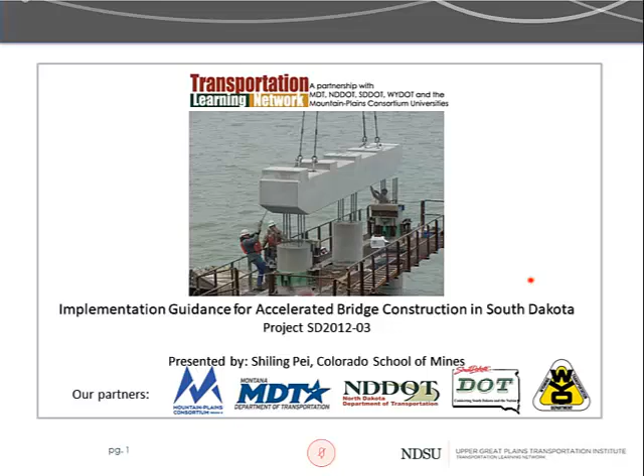The outline of my presentation will talk about the project background and motivation, which we touched on already. The literature review is a huge part of this research project, simply because, if you think about it, in South Dakota we're trying to learn what we can do with ABC, and before we even started this project, other state DOTs and other research institutions had done a lot of research and even some very significant projects on ABC. So a big part of this project is to conduct literature reviews and then come up with the summarized ABC catalog, which you will see here, for South Dakota DOT, so that it can serve as a reference material.

In addition to literature review of the reports and papers, we also conducted ABC interviews. Those are towards the states who have the experience and have done projects with ABC. So we'll walk through those interviews, what we talked about, and what are the main findings.

Those two items, we combine all that information and then consolidate it into an ABC catalog, which you can think of as your component-based recipe book. If you have a project, you're thinking, oh, gee, am I going to do ABC or not? First, you can come to the catalog and say, what's possible, okay? The catalog itself has a lot of good information, but it doesn't really tell you when you should use one

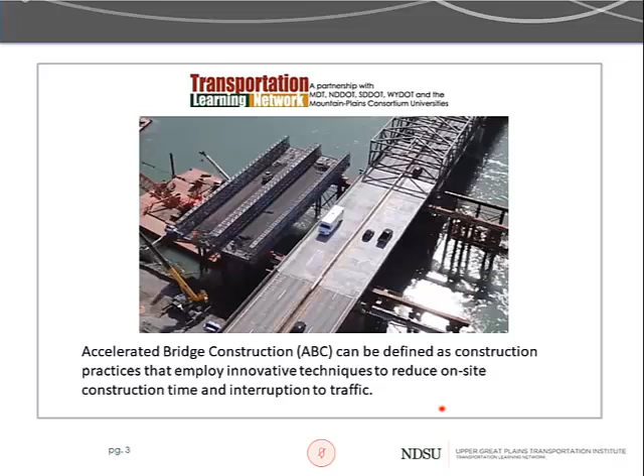Okay. Well, I assume that if you're in the presentation, you know what ABC is, but basically it's just how we can build bridges pretty fast to minimize interruption to the traffic. That's how I see it. The statement on the slides is, I think, the official definition from the Federal Highway website. I believe so. The point, if you get one thing out of this presentation, is that you don't want to do ABC just because you can.

The picture shown here is actually, if you think about it, ABC as this new technique that gets spearheaded around the nation. The kind of harbor of ABC is down in Florida, and I think a couple months ago they had this bridge collapse. I don't want to make a statement because I believe they're still under investigation, but

sometimes you have to think about it, because as public offices, DOTs' true objective is really how to serve the public better rather than getting a box checked. Oh, we are doing ABC. Safety first. That's very important.

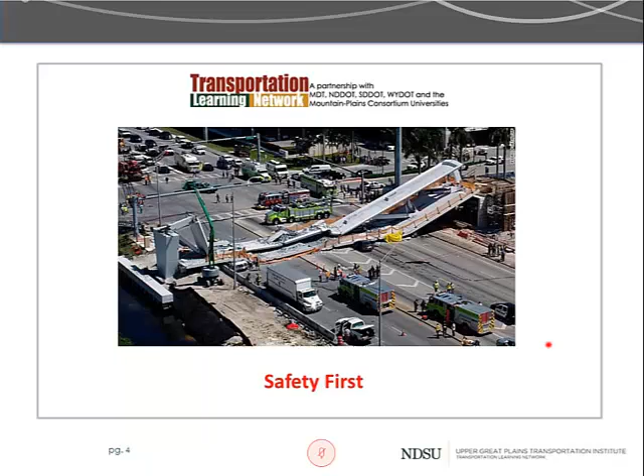So let's dial it back to 2012. We had this project from MPC and South Dakota DOT. So basically, each entity funded 50% of the project because we had the interest in looking at South Dakota, the application of this Every Day Counts initiative from Federal Highway in a state that is the fifth least populated state.

You think, okay, well, we do have a fair amount of highways because South Dakota, area-wise, is pretty large. But we're not seeing traffic volume as high as on the coast or even some other places in the Midwest. So the challenge is what do we do? Do we do ABC for this road?

Some of the roads we kind of know, yeah, there's no benefit of doing that, but we want to provide a systematic way to do it instead of ad hoc as a bridge engineer. So we have some procedure to fall back on.

So first things first, the project was initiated and it lasted for two years, and I put a little baby here, which actually has ABC in here, which is basically saying that although I'm doing the presentation, I would not be surprised that some of the audience engineers would have more experience than me doing some ABC techniques, some specifics.

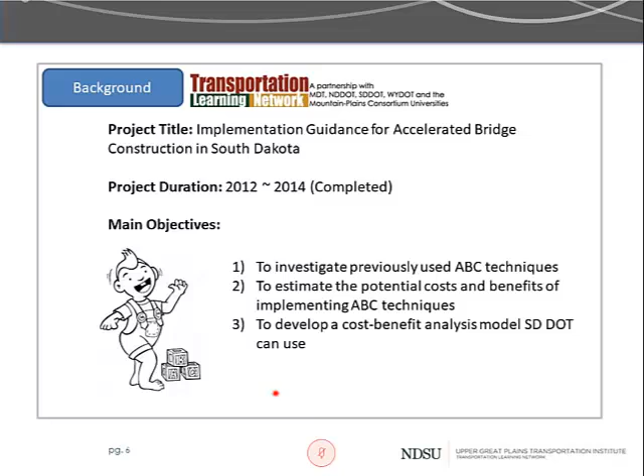This project is really, I'll be honest with everybody, my first ABC project, because they were calling in ideas and research needs. Then we said, okay, well, maybe we can do something about it. We're not experts in any specific ABC techniques per se, but this project is to help South Dakota get a general idea and also to do a decision-making process to try to formalize that.

So the four big parts of the project deliverable, yeah, maybe it's not completely deliverable. The real deliverables are the middle two, the catalog and the decision-making tools. So in order to get the catalog, we need to do the literature review and interviews. Literature review is you just go online and Google it or Google Scholar, and then you also check for public records from the DOT's reports to go through them.

The interviews really, after we did the literature review, we got an idea which DOTs around the country are doing it the most. So we actually went ahead and contacted those DOT people and had them give us some hints on specific techniques that they are very experienced with.

After they get the technique summarized into a catalog, we go into the decision-making tool. Then finally, we did some examples specifically for South Dakota, and this seems to make sense. I'll show a couple of examples at the end of this presentation. So first, let's cover literature review.

When we started the process, the Federal Highway initiative of Every Day Counts, that's the huge thing. So you want to go to the official website of ABC, which I just checked, is still being updated, I believe. But the ABC manual, you can download it. So if you know nothing about it, you just know the word ABC and want to do something about it, that's a very good beginner's guide.

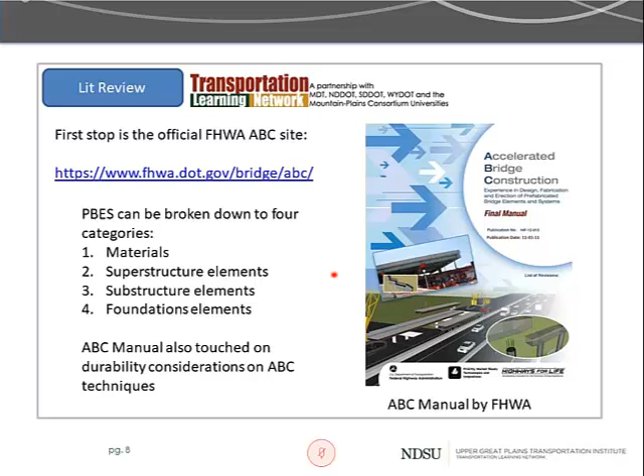Then we also went out and found individual case studies and planning study reports from various DOTs. This was done back then. If I recall, that's like 6 years ago from now. We did some Google searches, and then some reports came out, like the Utah. There's a case study on one project.

Washington State, this document is more focused on the implementation plan of how Washington DOT is trying to do ABC, and then there's a collection of projects from California, 7 projects. Yeah, this is a good one if you're interested.

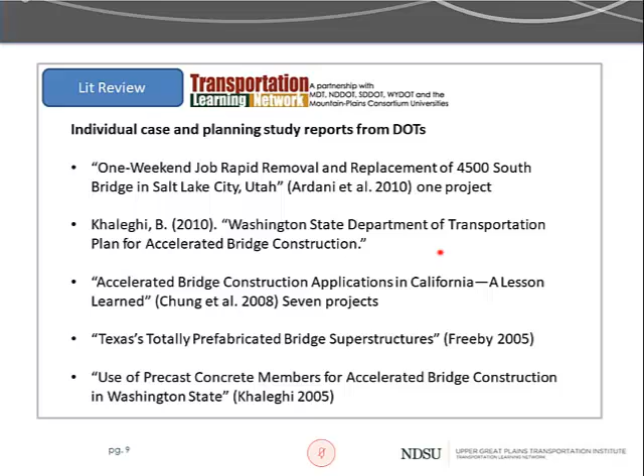Then Texas, and then Washington State, and you're actually going to see those states, Texas, Washington, California, and Utah, they are really a few of the states that first latched on to ABC and gained a lot of initial experience, at least at the time we did the project. So you'll see those states coming up frequently during this presentation because we constantly come back to them for advice and interviews.

Then there are some other more general reports and references, such as connections. Those are more specific for particular types, self-propelled modular transporters. Frankly, this is getting pretty dry. I'm not going to list all the references we have. I'm listing them here just in case you're interested in one of the topics; you just download the report, and we'll have those references in the report, then you can get them.

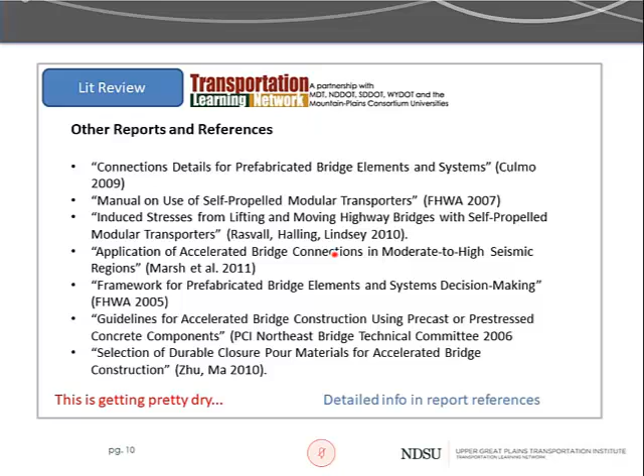But the main point is that when we started the project, I believe for like 2 or 3 months, we did nothing but literature reviews. We were just sitting in front of a computer and kept reading. Then we came up with this basic structure of our catalog. So purely from literature review, at this point we hadn't talked to anyone yet.

And then we grabbed some photos, we have the description of each technique. We organized an ABC catalog based on different categories and subcategories. What I didn't show is that inside those subcategories, there are different techniques. Later I will have a list, but we have about 30 to 40 techniques listed here. Every single one of them got almost like an ID card, where we have the description, the source, which is pretty much the reference, and then an example project.

So at this point, we're like, okay, if we can gather information about those techniques and present it to South Dakota DOT, then we'll have completed the catalog. Because the catalog is actually more than this card. This card is just part of it. But before we do that, we have the card, and we want to communicate with South Dakota DOT saying, hey, these 35 techniques you can potentially use. What are you interested in knowing about them?

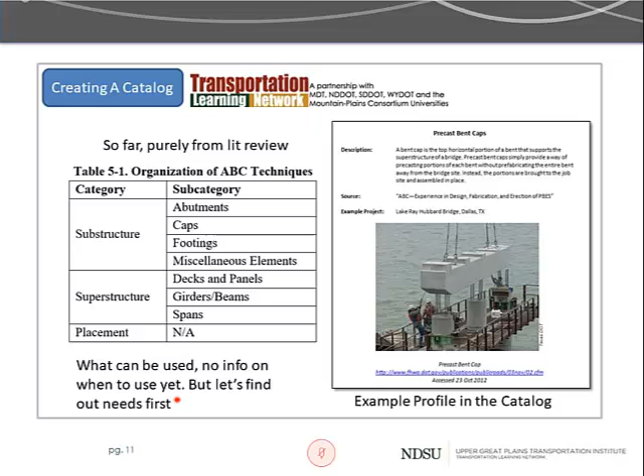So South Dakota DOT employees, we will kind of ask them questions in four categories. The first one is current experience. We want to ask this because we know at that point, back in time, not many ABC projects in South Dakota, so the experience is likely minimal. But that will give us some hints on what kind of experience they need.

Then we have some reader feedback on the catalog. We basically ask South Dakota DOT employees, those are the 35 or 33 techniques. Do you see we're missing something significant you want to include but didn't? They'll say, oh, you know what, it's pretty good. Then we ask, for those specific techniques, what are you interested in? We basically tell them if you're interested in some aspect of this technique, then we'll make it a column of data in the catalog, which in the end became a big fat table.

Then finally, we kind of lead into the decision-making process. We'll just say, okay, right now, without us doing this project, if you're gonna consider building a bridge and try to do decision-making, what is your process? So the South Dakota DOT employees get back to us. We actually sit down with them over phone or in person. They are interested in the benefit of the specific technique.

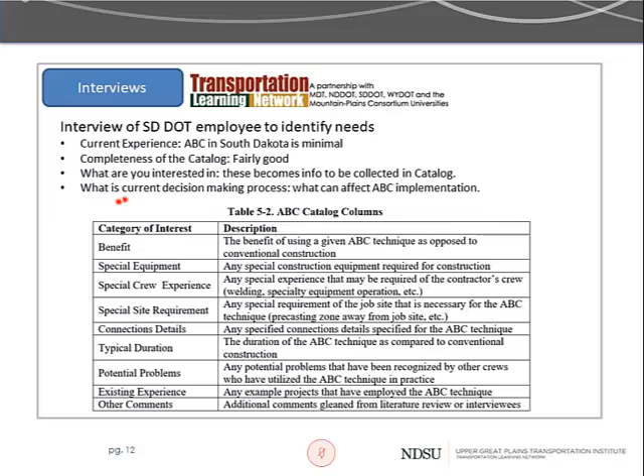So that's how we interviewed the South Dakota DOT employees, and those categories of interest in the end became the entries for each technique within the catalog. So if you download our catalog, which is a big table at the end of the report, you'll be able to read a description of each of those categories of interest regarding every single one of the techniques, as long as they are applicable. If they are not applicable, we don't write anything in there.

So now we know what South Dakota DOT wants to know about those techniques, and we also know we have a pretty comprehensive set of techniques as far as we understand. So now it's time to ask the experts what they have to say about those techniques regarding the categories of interest South Dakota DOT wants.

So we interviewed colleagues from Utah, Texas, Minnesota, Ohio, Washington State, and California, and they were great interviews. We asked about details on the process, requirements, constraints and benefits. That's pretty much what we just covered in that table. And then also the decision-making process, or any tools they use for ABC. So that kind of led to the next stage.

But we really appreciate those engineers that devoted their time, pretty much for free, to answer our questions and do the interview. This was very, very helpful.

So the interview outcomes are detailed in the final catalog and the report if you want to read them. But here we have some high level summary from each DOT interview. Like in Utah, the Utah DOT is pretty experienced with those techniques listed. I'm not gonna try to race through all of that. So basically, we asked them about those.

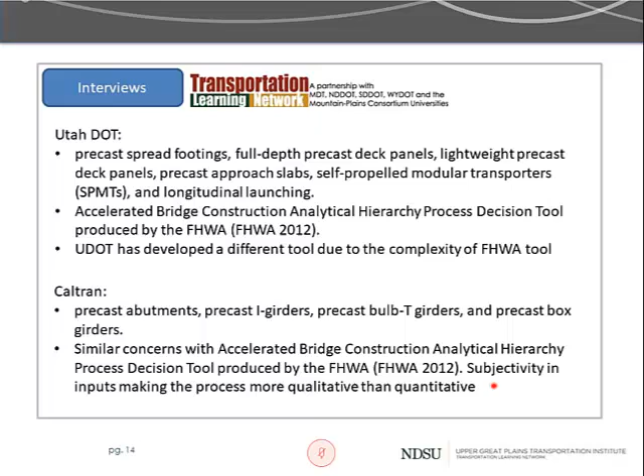Then we interviewed Caltrans. Those are the techniques that they have experience on. As far as the decision making goes, same idea. They have similar concerns with the ABC AHP decision tool. They also mentioned that aside from the input process for this tool being very complicated, there's a lot of subjectivity in the input. This makes the process more qualitative than quantitative, and it is not as systematic as they want it to be. So they didn't use that, I assume.

Texas DOT, they have mostly precast member use. They don't use the federal highway tool. I think in Texas they pretty much just make decisions on a case-by-case basis. They didn't mention whether they are using a simplified version of the tool or not. Anyway, they feel it can be a useful tool if, and this one is a big if, all inputs are known. And we're going to run through that tool a little bit and show you what the input is going to look like. It's a lot of inputs.

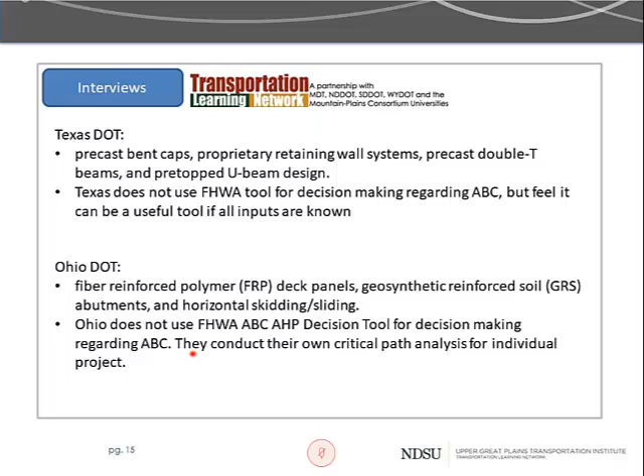Then Ohio DOT, they did not use the federal highway tool. Surprise. They conduct their own critical path analysis for individual projects. I think their techniques are quite specific to individual projects. So there's no uniform tool. So we didn't get that. The Minnesota DOT, they actually tried to use the tool, but it was too complicated and, well, you kind of see the trend here. So they don't think it's effective.

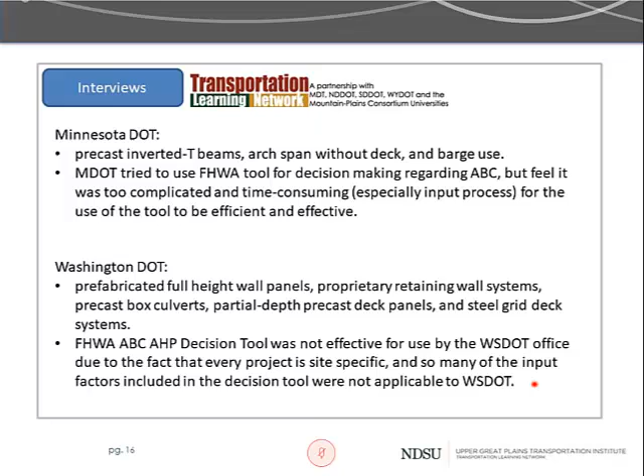The Washington DOT, they feel that the project site probably has more impact on the decision of ABC than trying to go through the complicated tool. They don't feel that the input factors were applicable to them, and so they pretty much just make their individual project-by-project decisions on that.

So although I kind of run through this, it's a little boring. I kind of even feel it myself. But in fact, it is actually totally not boring to talk to our DOT colleagues who have the experience, because we actually go into every single technique and they tell us what they feel about it and what their experience is. So we got a lot of great information. I'm not going to present that all today on the slides, so go download the report.

I highly recommend it. None of the people interviewed actually use the federal highway decision tool, except for maybe one state. I actually looked at the decision tool. It is a mathematically reasonable framework, but it is not very user friendly.

So when we were done with the interviews with the DOTs, we completed the catalog. Besides those report card type figures and descriptions, we also have a table that includes all the interview results. We summarized them and put them into the categories that the South Dakota DOT has interest in. So right now, the catalog becomes a list of techniques and a big table that includes the different properties of those techniques. At this point, we feel we have a pretty good handle on what is achievable. So now it's about how to decide when to use any one of those techniques from the catalog.

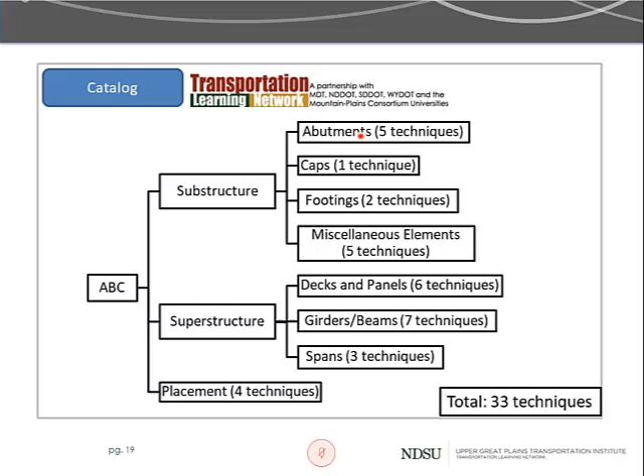Yeah, because otherwise maybe people already go to sleep, or if they're eating their lunch, they're not likely to go to sleep, but it's okay.

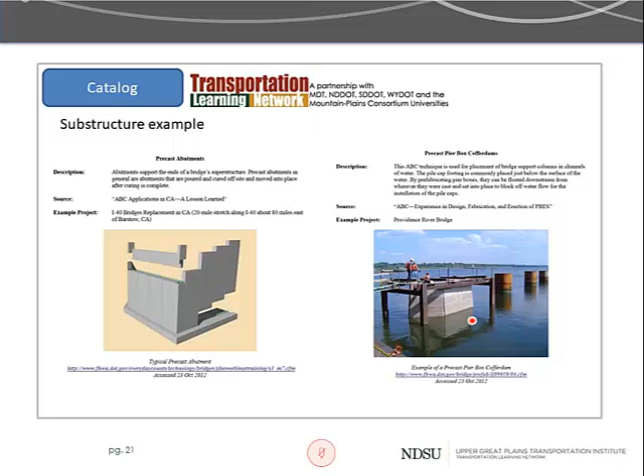So we're not gonna talk about all of them, but I'm gonna show you a few examples, just really high level, just show the report card. Like the substructure, examples such as precast abutment, and then the precast pier box cofferdams. Yeah, this is actually pretty cool. And then the deck example.

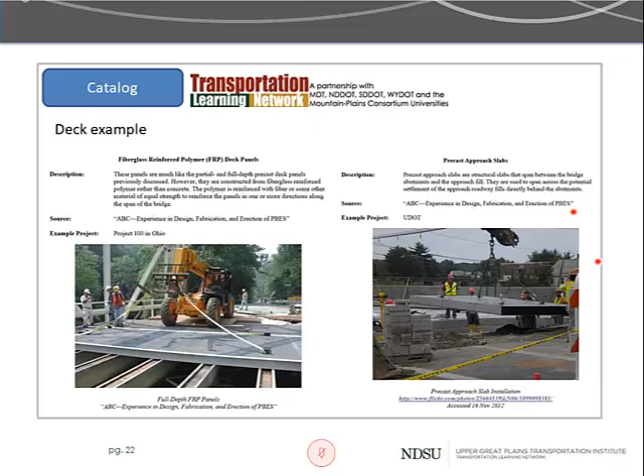Then you have some really innovative FRP deck panels. You just place it in, and then you screw it down or do some welding. Then you're done. Then this one's precast approach slabs. The superstructure, this is a fun one because when you get a spotlight of ABC, you always see things like people moving the entire bridge. That's a superstructure. Yeah, I haven't seen this one, but this is really pretty impressive.

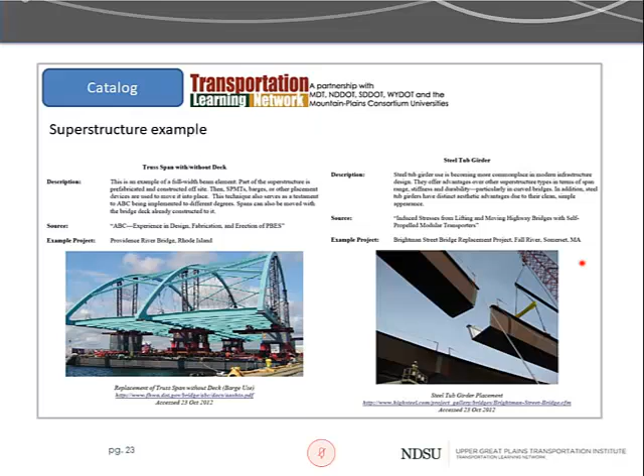You're moving the entire steel arches, and then also steel tub girders. Some of those things, such as girders, precast, those we do all the time if you're using a precast component. But yeah, I guess it kind of fits into ABC if you do it really quickly and efficiently.

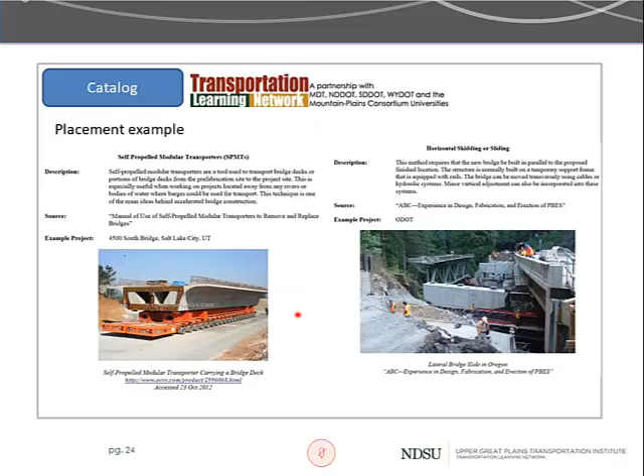Then there's placement techniques such as the modular transporter. Yeah, this one's also really, if it's in the news, it really catches your eye, right? It's like a robot. Then more traditionally, we have horizontal launching or vertical launching or sliding. Those are actually very nice techniques that don't necessarily need expensive equipment, but just need very good planning.

So consider you have those techniques now on the top of your table. And then now you're like, okay, do we want to really do this? So we want to have a process where you just give me a project and its input, then I'll give you a yes or no answer to try ABC or not. So the first thing we think about is look at how others have done it.

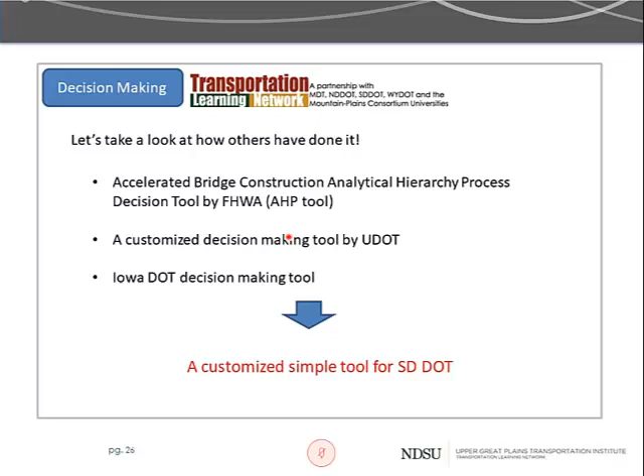The first one is the official tool, that nobody likes. Then there's a lot of tools that actually get used, like the customized decision tool, for example, by UDOT, which is Utah, and Iowa DOT. And basically, we reviewed those, and then we came up with a simple tool, a custom version for SDDOT. So let's take a look at this official tool first.

This one, I think I say a lot that not that many people like it. I guess it has its own merits. It's just I don't feel everybody likes to use it as the initial screening tool. In fact, if you have a project that's really borderline and you want to do a very detailed analysis on it, I think this tool is actually pretty great. You can check it out by downloading it from the Federal Highway website.

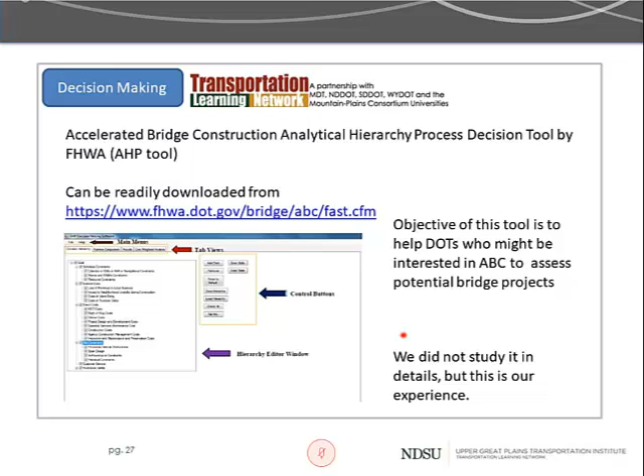But yeah, I feel it is good because it gives you a lot of options. But typically, when we make decisions, initially we want to make it fast, so that's not very useful. I did have my graduate student look into trying to use it. Again, we're not experts on it, but here's our experience. So it goes like this.

The decision tool breaks down the considerations into different categories, and inside different categories, there's subcategories. The idea is, okay, you have those categories inside the project, and which one's more important to you? So basically, the program will constantly ask these questions. It'll have you compare one category to another, like which one's more important.

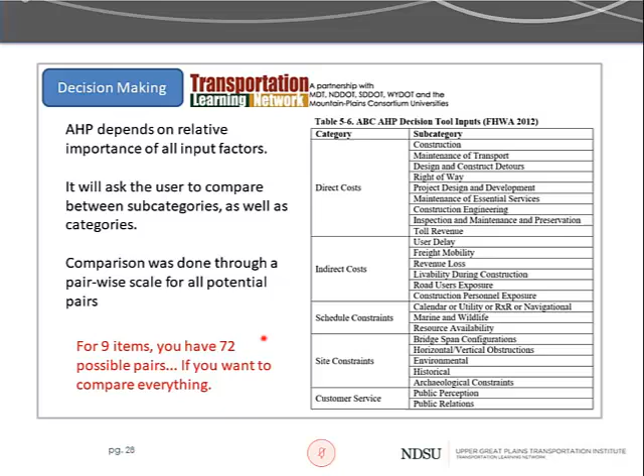Yeah, and you can see this can get really out of control because it's not like we're gonna consider all of them. Even if you just pick 9 things that you're interested in, then you're gonna compare them pairwise. You have a combination of 72. You divide that by 2, you have 36 comparisons, if you want to compare everything. The comparison goes like this. They will actually say, user delay or freight mobility, which one's more important to you? You can shift this to the user delay.

So you say, yeah, I absolutely don't want the user delay, I don't care about freight mobility. Or you can shift it to here, or you just put 1, which means they are equally important. And then this goes on and on and on. Like, yeah, I can see the potential issue.

Like, I'm a teacher, so I have students in my class. If you just pick 10 students, student A, B, C, D, E, F, G, then you just say, hey, which one's better? Is A better than G? And is G better than D? Is D better than C? Is C better than A? You see, I bet the program has the algorithm to handle it within itself, but potentially you could run into something that A is better than B, B is better than C, but C is better than A in some aspects. So it's just too much comparisons.

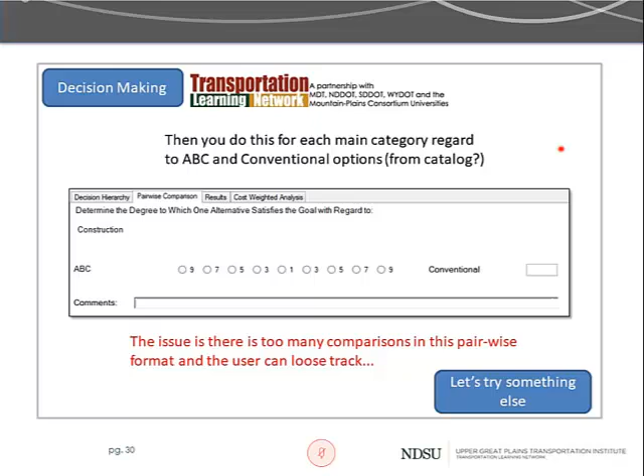So we didn't end up using it, and you're welcome to give it a shot, but I just don't feel it is a very efficient initial screening tool. It might actually be very powerful when you get to the later end of stage, but definitely in South Dakota we're not gonna use that for our initial assessment because the initial assessment should be quite simple. So we try something else.

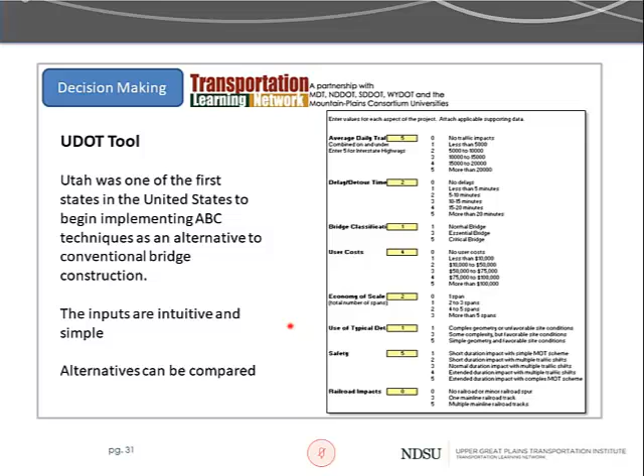So basically, you just go there. It's quite simple. You just assign the number, then you pretty much add all the numbers together, and then times the weight factor. Then you get an adjusted score. Then you add everything up. Then you calculate a maximum possible score. So basically, you just assign the maximum number for each category, and then calculate the maximum number you can ever get. But you're not gonna get that, right? You're gonna get this number. So you divide the two, and then you get a percentage. So that's your ABC score. Like this one, if you divide 174 by 274, you get 64%. So your ABC score is 64.

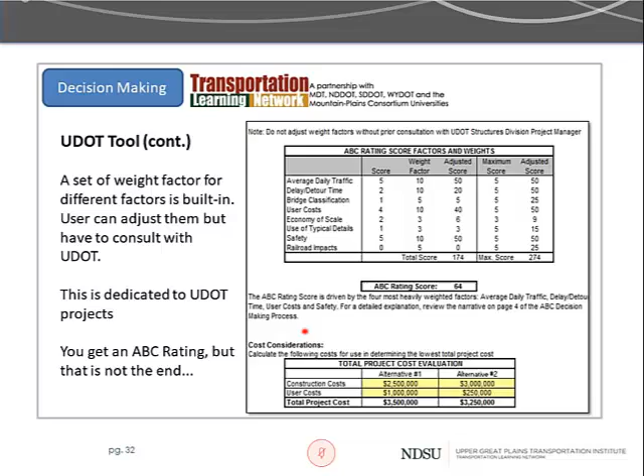The factors, UDOT has their own factors. They don't recommend you change it, but of course, if you want to use it, you can change it. Then you end up with a rating. A rating from 0 to 20, then it's pretty much no. So you don't do ABC if you don't even pass 20. If you're 50 plus, you only need to answer one question. I can't really read it, but there's one last question. If it's yes, then you try to do ABC. And then if you're in between 20 and 50, there's a couple of different hoops that you need to jump through before you decide to do an ABC.

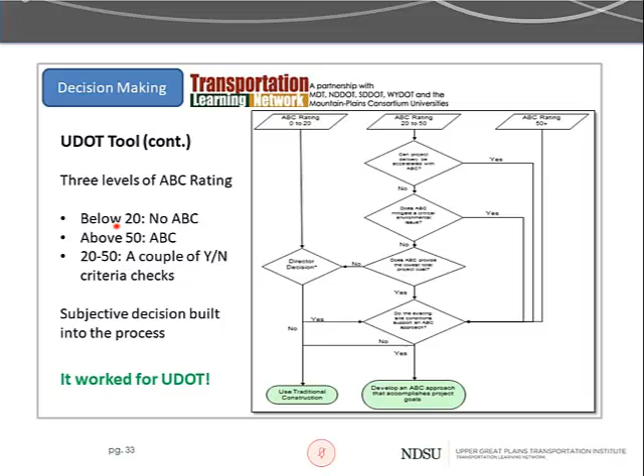And also again, I think even if you went all the way to this box when you decided you're gonna do ABC on this project, it only means you're gonna probably seriously pursue a bid on ABC and then look at the cost together. So even at this stage, it should really just be a preliminary tool that directs you if you want to put resources on actually seriously considering an ABC bid. So that's the UDOT tool. This one's really very intuitive. There's no pairwise comparisons. Then we go into the Iowa tool.

Even simpler. There's like 4 things that they are interested in: average daily traffic, detour length, user cost, and economy of scale. And then they also have the different categories, which number you fall in, then which one you need to do. The first stage, they basically just weed out the cases without doing complicated analysis. This one's very similar to UDOT and even simpler, and we really like it. So actually, we kind of copied that for South Dakota. You'll see that later.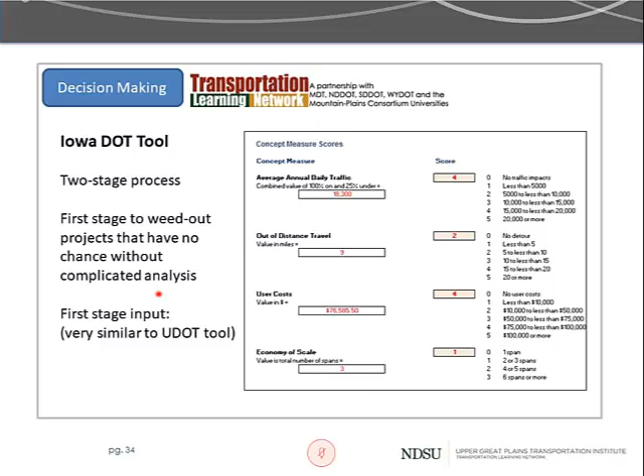Then they also assign a weight. They also do like a max weight and then do the ratio. Yeah, I don't know, it happens just to be 64 a lot of the time. Then if you're going to 50 plus, then you go to stage 2.

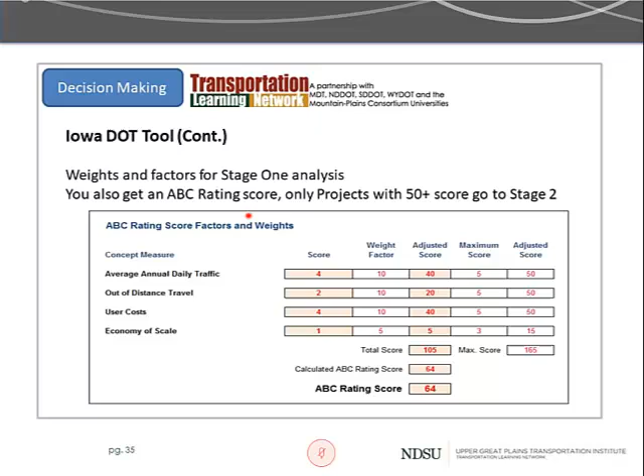So the difference between Iowa and UDOT is that for UDOT, there's this mixed middle range where they just ask a lot of yes and no questions. But for Iowa, it's 50, you make it or not. Then when you go to stage 2, actually, I'll take it back. Iowa is actually using the decision-making tool. So if you can make the 50 for the first round, you do the tool.

I think the effort to actually go through those tools will now be better justified. So at least you don't need to do this tool for the majority of the projects. So we looked at those two approaches, and we really liked them both. Then we thought, okay, for South Dakota DOT, we're not going to use this for most of the projects. It seems like a 2-stage decision-making format is good. Then we'll try to use stage 1 to eliminate a lot of cases.

So we came up with our stage 1 and 2. You see, this is a little bit different than both the Utah DOT and Iowa DOT. The first one is pretty much Iowa DOT. We have the average annual traffic, detour distance, user cost, and economy of scale. Then phase 2 is more cost related. This is from the input from the South Dakota DOT.

And then we'll show you how, and we even have the non-traditional cost in it. And there's a lot of cost information. So in the report, we did some more literature review and interviews to find out the cost information for South Dakota. We'll talk about that in a little bit.

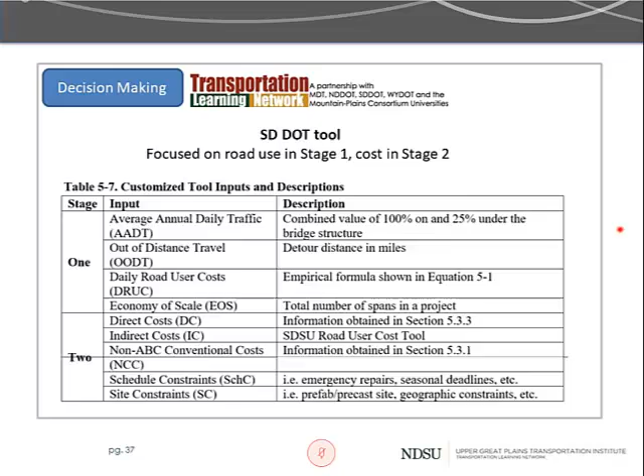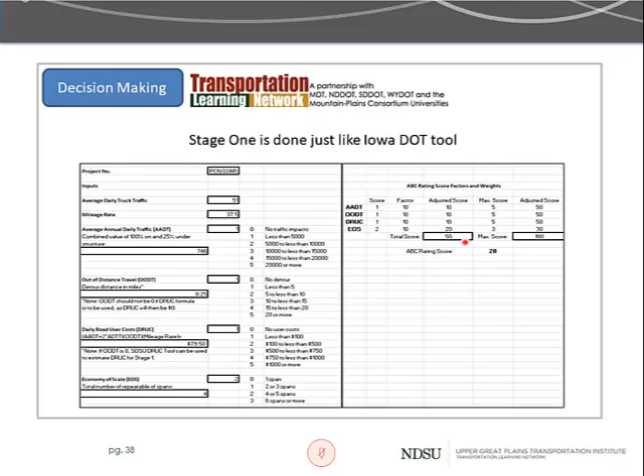Oh boy, okay. The tool itself is just an Excel sheet. This is phase one. Then we have a score. Similarly to Iowa DOT, this one happens to be 28. It's probably not going to make it. Then stage 2 is another Excel sheet in a similar format where we get another updated score. Because keep in mind, stage one and stage two actually have different categories. So those two scores are in a way not that related to each other.

Then from that point on, we get the stage two score, which is more related to cost, and then kind of copy the Utah flow chart where we have the no ABC, then a transition zone, then we look at the site condition, feasibility, those types of things. A lot of yes and no questions. Then finally, for the ones above 50, only the cost concerns. So if the cost makes sense, you can do that. So you can see the South Dakota DOT tool that we developed is kind of a hybrid, but focuses a little more on actual cost.

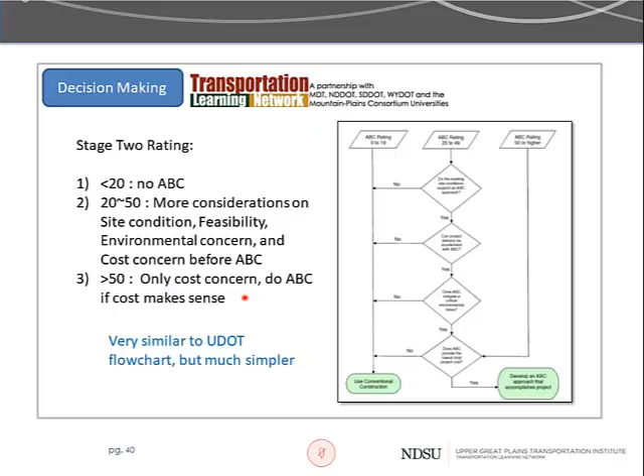So some details for the South Dakota DOT tool: frankly, this is our first time doing it, right? So we don't know which factors are going to work out. So we just said, okay, we'll weigh them equally. Later on, given this format, I would assume that if South Dakota DOT keeps using this tool, they'll be able to adjust the weights as they go along. And then there's a lot of cost metrics, like I said, for stage two.

So some guidelines, some costs like user cost. We have a simplified formula to calculate it in stage one, but in stage two, we recommend an existing, more complicated tool to calculate the cost. This tool was actually developed by one of my colleagues at South Dakota State University also. I'll show you a little bit.

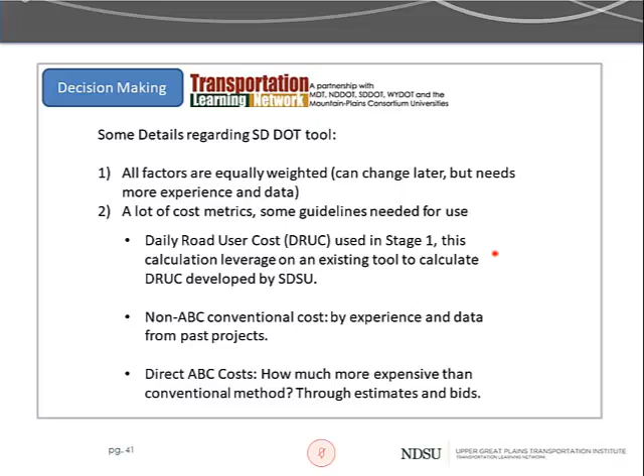Then there's the conventional cost. We gathered those costs based on experience and data from past projects. Then direct ABC cost, like how much more expensive it would be than the conventional method. There are some rough estimates based on talking to some contractors in South Dakota. Again, all that cost information is very South Dakota specific. So if you want to do something with what we have, you might be a little bit careful with that.

So the user cost, for the first stage, we used the simplified tool, which is, you could say, a simple formula. It is referenced from Iowa DOT.

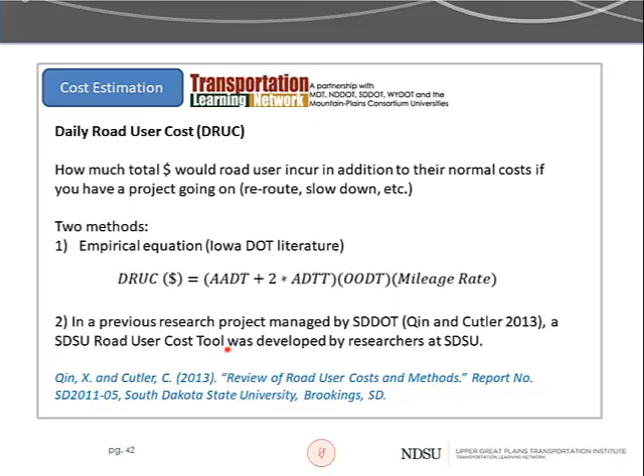They've been using it. So yeah, you see it's quite simple. Then if you are able to move to stage two, then we recommend that you use a research project that produced a tool which is called SDSU Road User Cost Tool, where it actually considers a lot of other factors. So in stage two, you should use this.

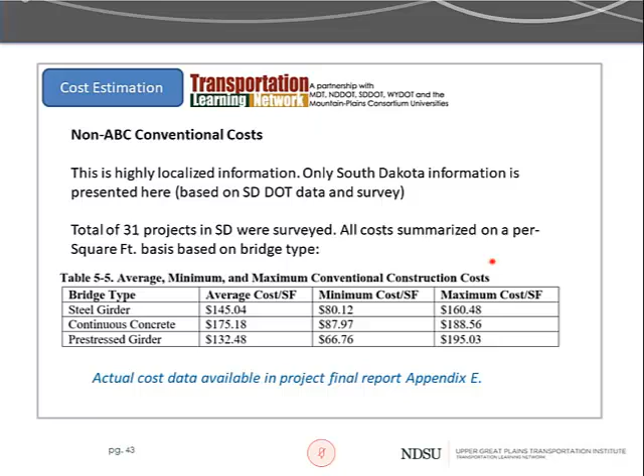Then non-ABC conventional cost, so we actually did a lot of interviews with some precasters, some contractors in Sioux Falls, and then we kind of figured out in South Dakota, if you want to do those bridges, it is about this much cost per square foot of your bridge. And then we kind of used that, and those cost data are in Appendix E. They actually have some real project cost data from South Dakota bridge projects. But we have that information.

Then the big one is additional cost for ABC techniques. It is very localized, and then we don't have data. For example, those big transporters, at the time of that project, I don't know about now, but back then we just never used them in South Dakota. Then how would we know how much it cost? So we just kind of did some ballpark number. We divided it into three parts.

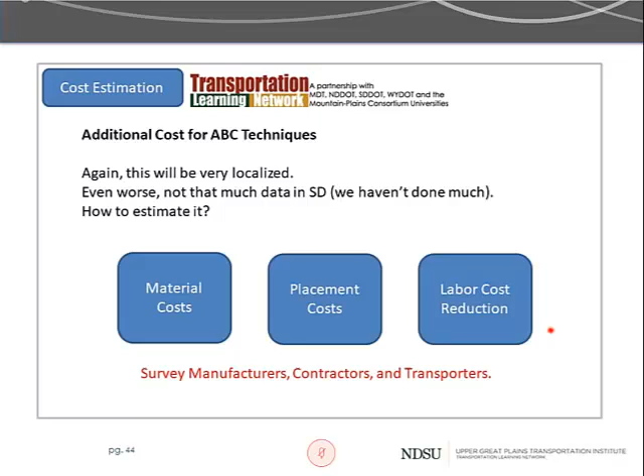The first part will be material. Maybe you use more, maybe you use less. This we don't know. Then we can just convert it to cubic feet of concrete or weight of steel, and then we can do estimation. Then placement cost, we just did the best that we can to guess it. The labor reduction is based on time, and this one's a negative value. Then you add those three together, you kind of get a ballpark number. And those numbers are all within the ABC catalog we have for each technique. You can take a look and reference, but keep in mind they are local.

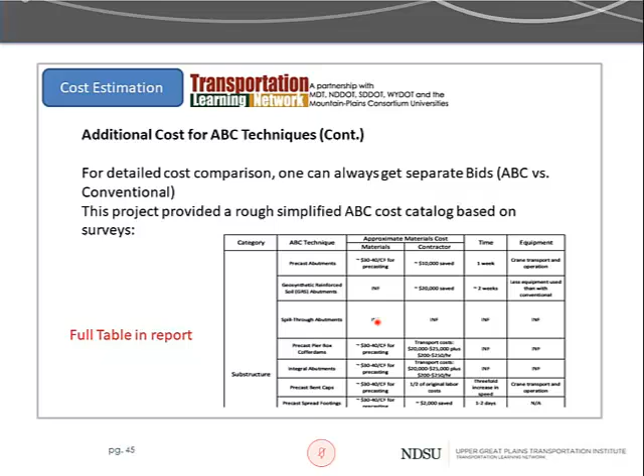So the cost information, you can't really read it here, but if you download the report, you'll see we have some ballpark numbers in there. We don't know if it is accurate or not, but to our best knowledge they are in the ballpark. And if we don't have the information, we just put INF. So this part of the catalog can be improved once South Dakota gets more information, then they can modify those numbers.

Then we say, okay, now we got the tool. Let's try to do some examples. Let's try this on 3 real projects in South Dakota, past projects. The examples serve 2 purposes. The first one is to actually show how to use the tool, just go through everything. The second one is to actually test the process, because we kind of know where they're gonna stand on ABC. The results from the tool should be reasonable.

So we look at 3 bridges, and there are 2 bridges that are really very rural, 1,000 vehicles a day. This bridge is actually on the interstate. Yeah, this one's actually interstate too. But anyway, this one's interstate near Sioux Falls, I believe. So this one's actually pretty significant. And it has another roadway on the bottom. So if you want to do cast in place, you're gonna stop that one as well. So it's pretty significant here.

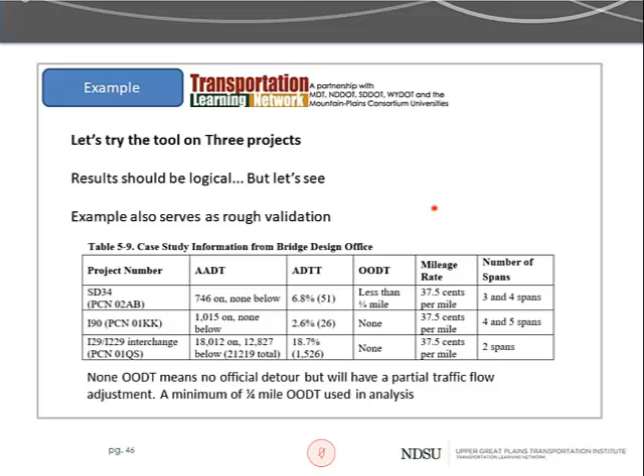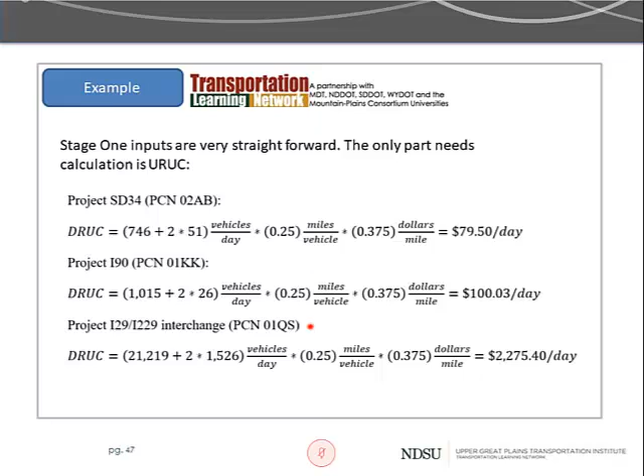The way we did that is we calculated the user cost for each one. Like I said, first we basically use that simple formula from Iowa, and you can see the difference. It's pretty significant. This one just stands out. Every day you're not opening it, you're causing $2,000 for users. Then we plug that in, and you see a lot of ones and twos for the first 2. You get some 5s, and there's some 1s. Finally, it makes sense. I expected the first 2; there's no way they're gonna make ABC. So we go with this one. Oh, this one's over 50. So we step to stage number 2.

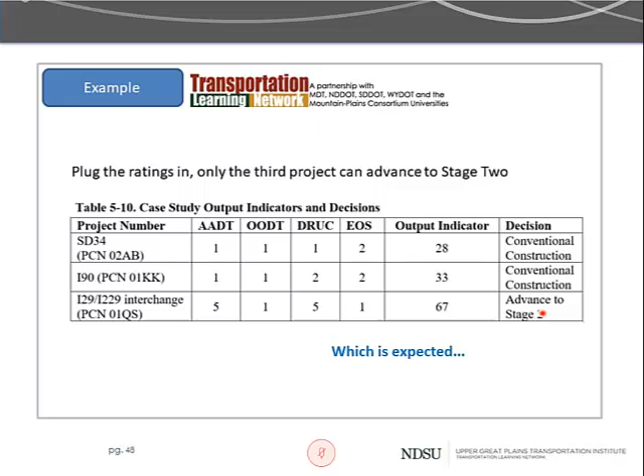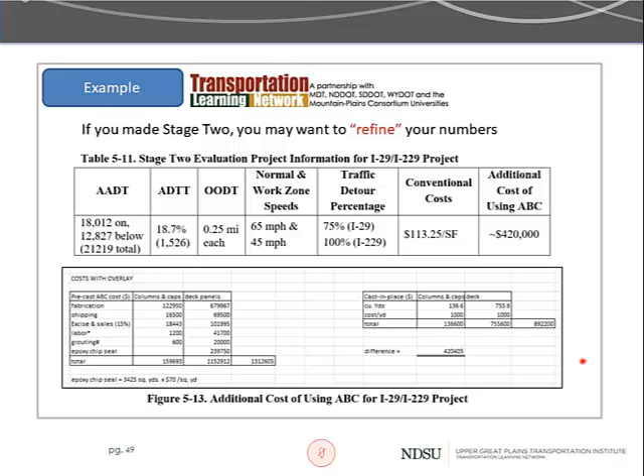For the South Dakota tool, when you go to number 2, this number doesn't mean anything to you anymore because you need to redo the input again. So you need to refine your numbers. So you have the conventional cost and additional cost of using ABC. This is what I just explained. You just go to the ABC catalog table and decide what kind of techniques you're gonna use. Then you find the cost information, add them up, minus all the labor saving cost, and you just do it. So this is the ballpark number. Then you compare it, and then you put some extra information into the user.

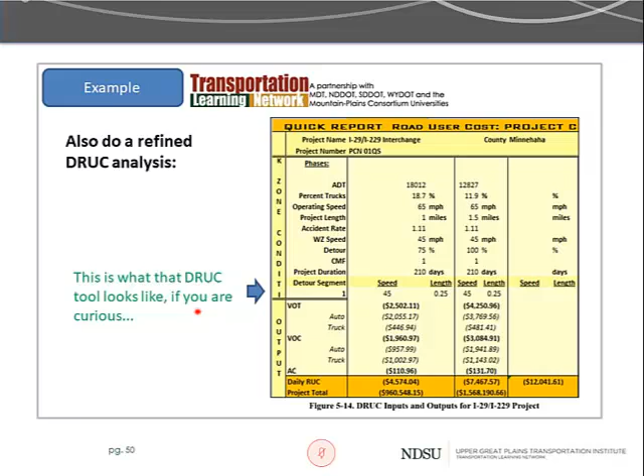What is that? The road user cost. That's the more comprehensive tool that we have. I think it came out to be one number. So we end up putting that into the category, the stage 2 inputs Excel sheet, different categories. In the end, the output indicator is 48, so it's between 20 and 50. So we use our flowchart decision-making question. At this stage, we kind of stopped there.

Basically, the conclusion is that even this big bridge near Sioux Falls, where there's a lot of traffic, is still not a knockout case for ABC. You're still kind of in the middle zone, which is kind of expected. We presented this result to South Dakota DOT, and the bridge office kind of agrees. They feel this process, just looking at those numbers, is reasonable. That bridge, they were pretty seriously thinking about ABC, but in the end, I don't think they did it. Or I don't think the decision had been made at the time of writing this report.

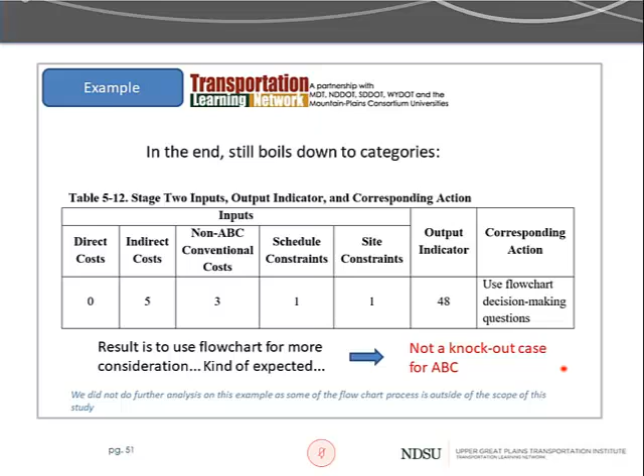So we didn't do any further analysis on the decision-making flowchart because we feel our job is kind of complete. So that's basically the story of our first effort to look into how to implement ABC for a state like South Dakota. We basically accomplished two things. The first one is we developed the ABC technique catalog for use in South Dakota. And if you use the catalog minus the actual cost information, you can probably use that catalog for your DOT as well. So that one's pretty universal, and we feel pretty good about it.

Then the second one is we have the decision-making tool. I would say it is a tool or a process because, like I mentioned, the tool has different weight factors for different categories of considerations. If you keep using the tool, you get more familiar with it, you gather more data, and then you'll be able to improve it later. But as a first cut, I think this tool was able to produce some pretty good reasonable results, and hopefully South Dakota DOT will continue using it and keep improving it.

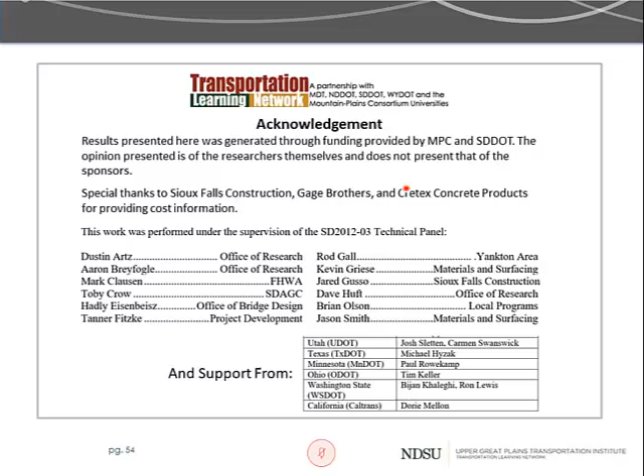First of all, do you know if South Dakota has implemented any techniques? I don't mean the scoring techniques, but have they done any accelerated ABC bridge since that time that you are aware of?

I am not aware of any myself, simply because I actually moved to Colorado in 2013. My graduate student Melissa actually finished this project with me in Colorado. So I think they probably did, but I myself personally am just not aware of it.

And I assume that this methodology can be expanded as new techniques come into play and as pricing drops for those new techniques. Am I correct? Yeah, so basically the catalog, if there are new techniques, and I bet there are, it's been 6 or 7 years, then they could be added into the catalog. But South Dakota, if they're going to continue using it, this catalog needs to be maintained. It's not a one-time deal, and the cost information also needs to be maintained.